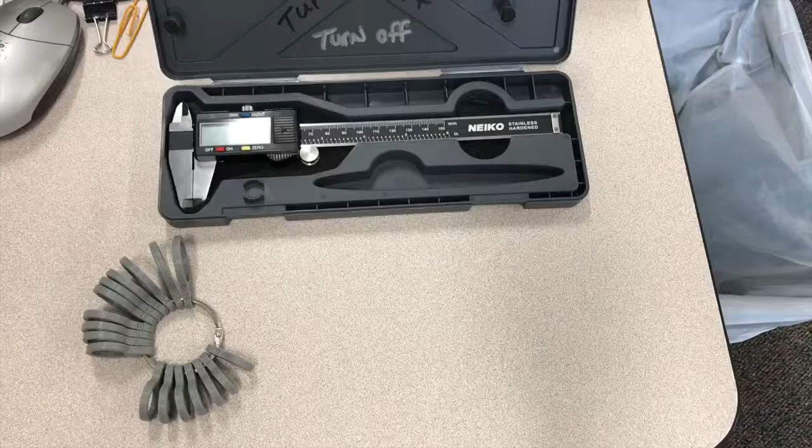This video is an attempt to clarify the issue people are having with making the rings the proper size for the ring project. Watch this video first. If you print the ring the wrong size, you do get points taken off for that, and I will not reprint it because you didn't follow directions.

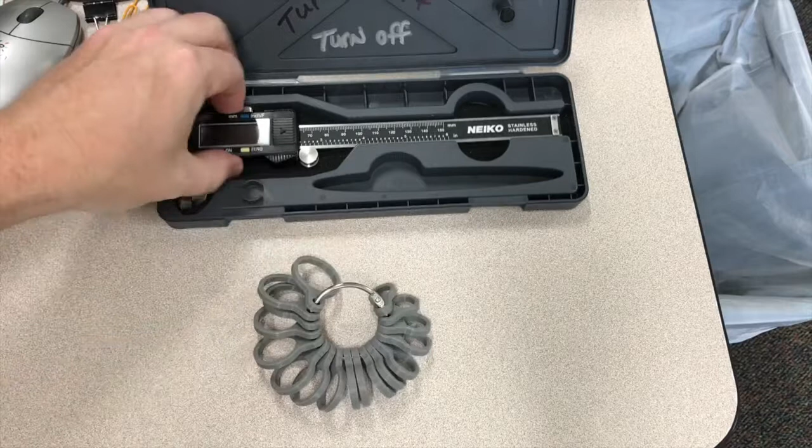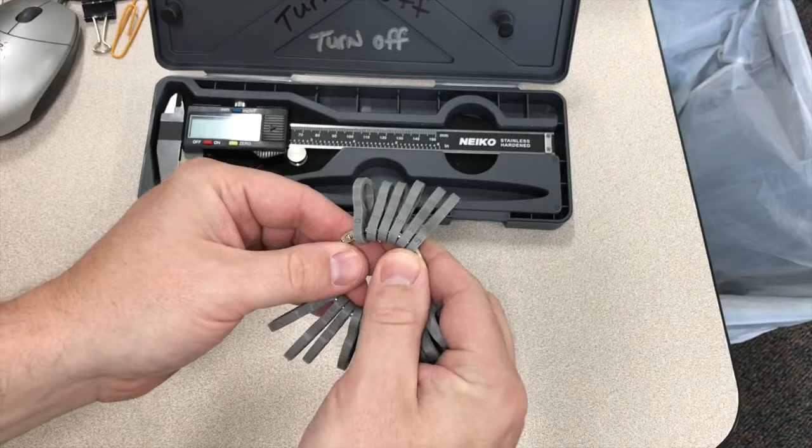You're going to need a few tools before you even start to design your ring: a ring sizer and a digital caliper. This is a jewelry ring sizer. You can see there are numbers on the side of each of these if you look carefully. That's just the number size so they go in order here. It doesn't mean anything for anything you need to worry about.

What you're going to do is go through - you can see the rings go from smaller to larger - and find the one that fits your finger correctly, whatever finger you want to put this on. Let's say I want to put it on my ring finger here.

This one's a little loose, so I'm going to go down a size. That one fits pretty good, and just to check, I'm going to go down yet another size. That one's a little tight, but it's not too bad, it's pretty good. I'm not going to shove a really small one on there - if it doesn't fit, don't put it on your finger. Find the one that fits correctly. That one's not bad, just a little snug compared to this one. I think that one's a little bit better for me. So this is the size I'm going to use.

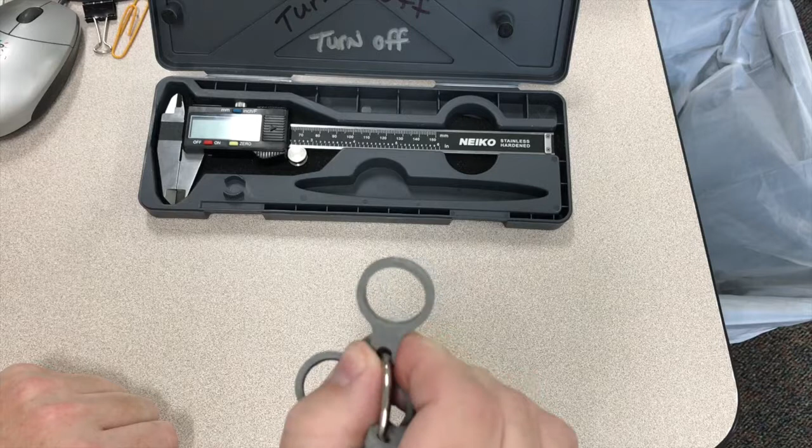Now for Tinkercad, we need to make a hole in our ring that you design exactly this size. To do that, you're going to measure it using the digital caliper. So take your digital caliper.

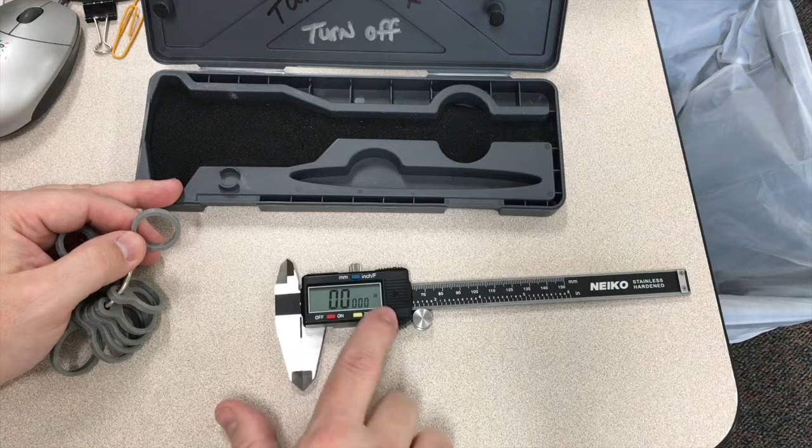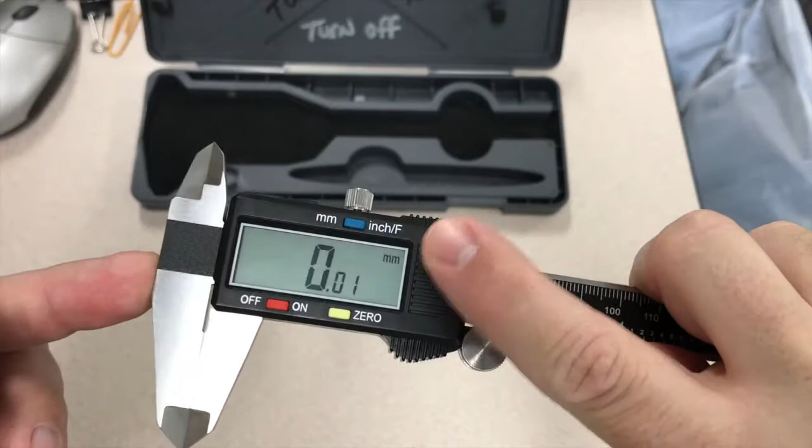Turn it on, make sure that it's not on inches, make sure that it is on millimeters. If you take a look at that, notice it says millimeters. I'm going to zero it out.

I'm now going to take this one that fit me, using the clamps here, the side that measures the inside diameter. I'm going to put it inside the ring, pull it apart. I've got like 19.3 that way. I'm going to measure it this way - 19.4. I'm going to take a few measurements - 19.3, and do another one - 19.3, 19.4. So I'm going to go with 19.3 because that's what it seems to be coming up with the most. So on your ring sheet, you would then write down 19.3 millimeters, and that is your inside diameter of your ring.

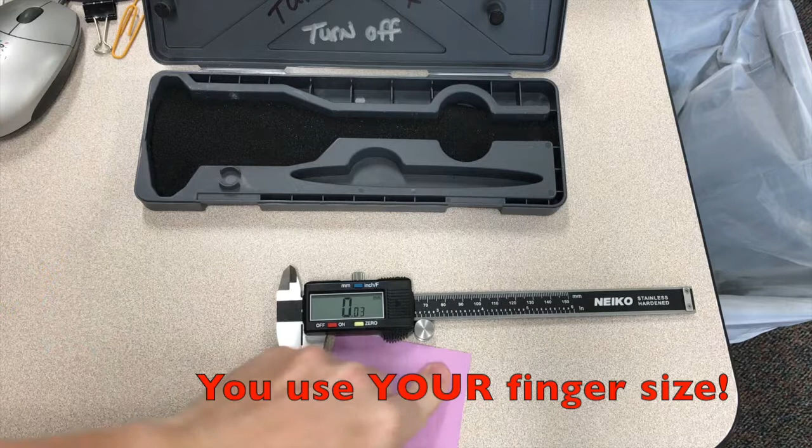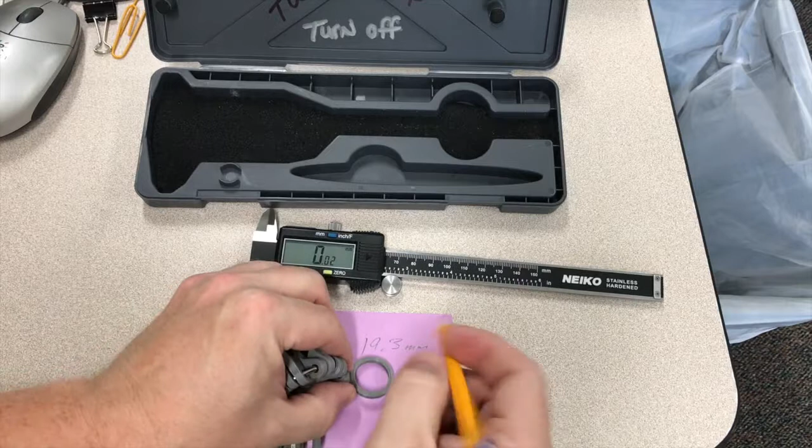So 19.3 millimeters, for my example, is the inside diameter of the ring that I need. Now, with that being said, that needs to be the hole size, not the ring. So if I were to take this, for example - right here is our 19.3. So what I need to do is make a hole this size in my ring in Tinkercad.

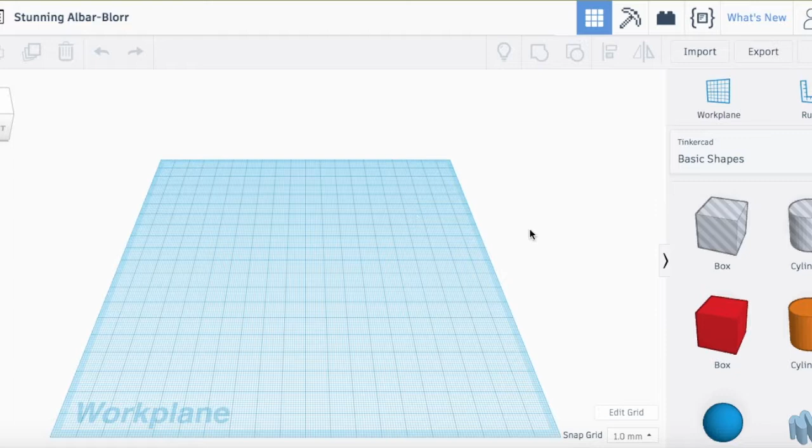So now that you have correctly measured the needed inside diameter in millimeters of your ring finger based on the ring sizer, we now need to make a hole that size. You're going to grab the cylinder and drag it out.

First thing I'm going to do before I even size anything is increase the number of sides to the maximum, because if I look at this, it'll be easier if I drag out a solid one. You see how along the edge here it looks like a stop sign kind of - of course it's not 8-sided, it's far more than that, but it's at 20 sides. If I decrease it... We want this nice and smooth, so we're going to take this and increase it to the highest number possible, and you can see it makes a nice smooth rounded edge.

Now we're going to want that for our hole, because this is where our fingers are going to be right against.

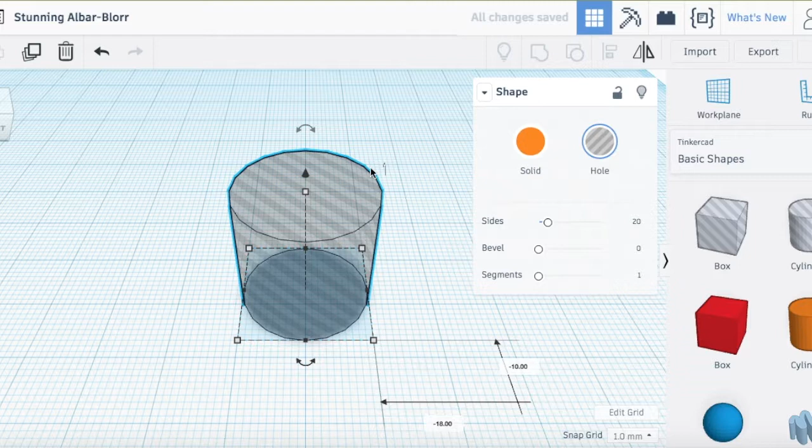We don't want any edges, so we're going to take this and increase our sides all the way up. Alright, now here's the important part.

Now we're going to size this correctly for our ring. In my example, my finger was 19.3 millimeters. Yours is going to be different. So I'm going to click on this, take the X and Y, and make it 19.3 on the X and 19.3 on the Y.

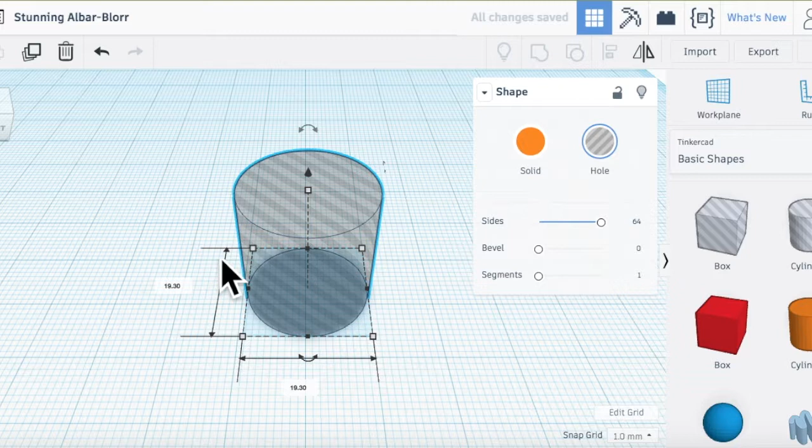Okay, so now this is the correct size. That is the size of my finger, the size of the hole I need for my finger.

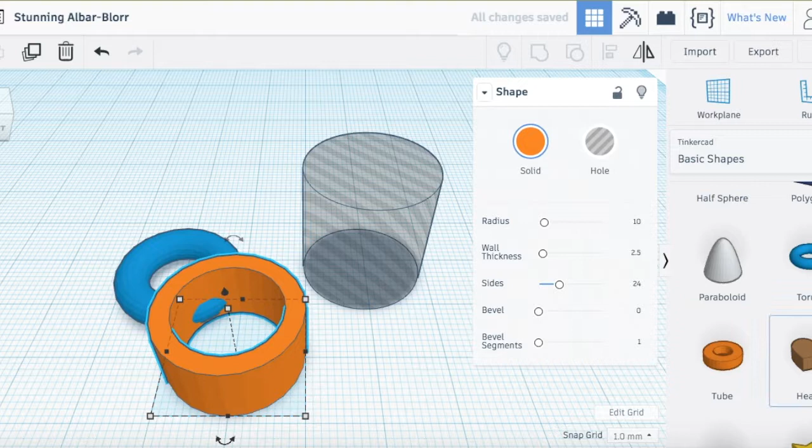Now we're going to make the ring part. You have a couple options: there's a torus, there's a tube. Either of these would work. I generally think the torus works best, but it's up to your design.

Do not just pull out the ring. Yeah, this looks nice, and you can make some adjustments on it. But if I were to take this ring and say, oh, I want this to be 19.3 because that's the size of my finger, so I'm going to make it 19.3, look, Tinkercad made a ring for me.

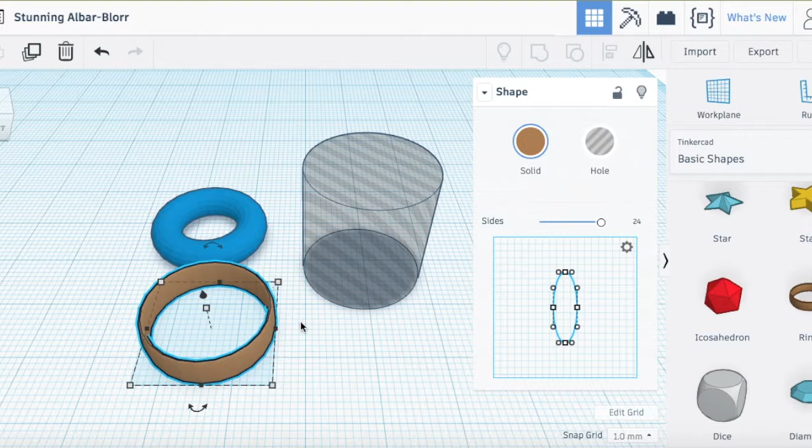No, that is the outside diameter, from the outside edge here to the outside edge here. If I were to actually print this and put it on, it'd be too tight. We want the inside hole to be 19.3, or whatever your measurement is. So don't just drag this ring out, okay? You need to make it.

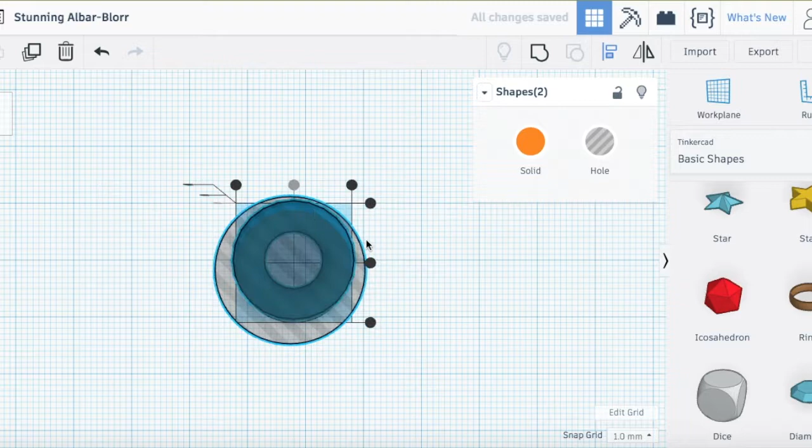So we're going to delete this. Now, I'm going to look at my torus shape here, and the measurements on it are 20. Well, I know this is 19.3, so like I was saying earlier, this is barely a millimeter larger. So if I were to align these like I would need to, center and center, you can see that if I were to cut this out, I'd be left with a tiny little piece of that torus. That's not going to work.

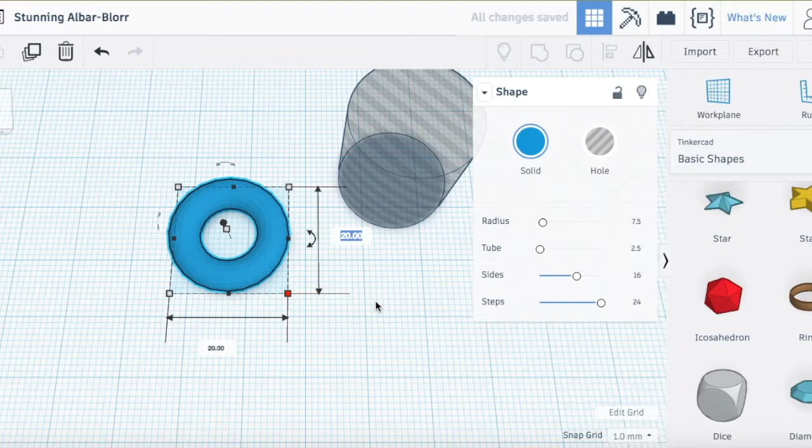So I need to make this thicker, and the thickness of your ring here is going to be decided upon your design. I don't want mine really thick, so I think I'm going to do 24.3 this way, and 24.3 this way.

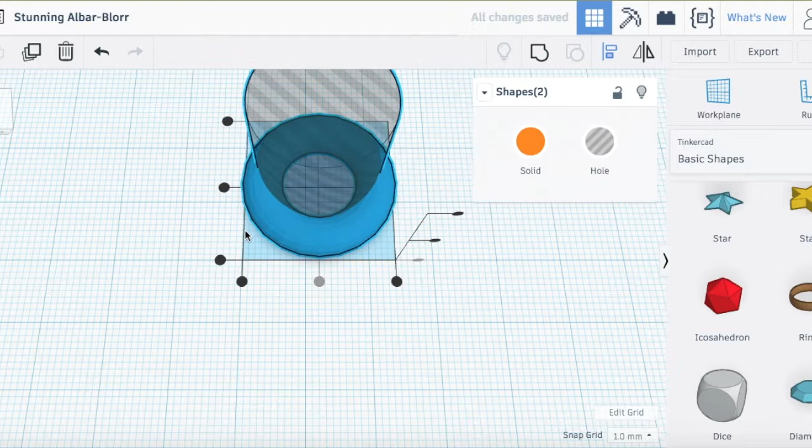Okay, so now if I were to align these and center them, you need to highlight them both, align them, and do center, center. You can see this would now give me a decent ring shape. So if I then group this, there is a ring that would fit your finger, and you can see the smooth edge on the inside.

Because remember, you need to do some engraving in here by using the letters. What I'm going to tell you about this is that you need to make sure you do this correctly. Now, the biggest, most important thing once you have this part correct is you cannot change this once you've made it.

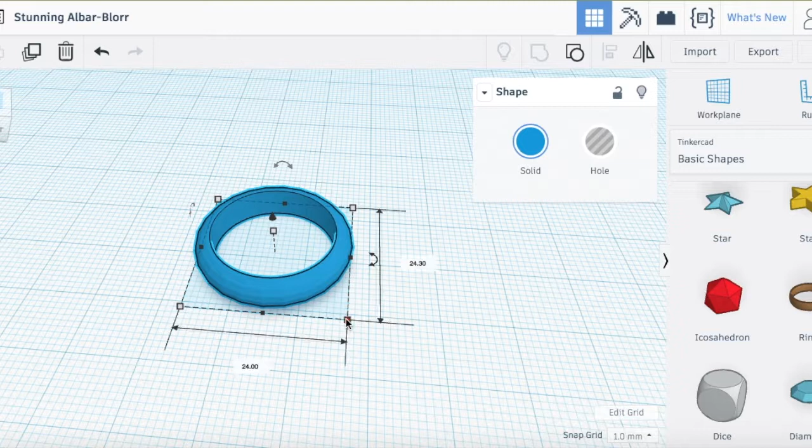Okay, so let's say I'm thinking, oh, I want to work on this, I need to see it larger. So I'm going to hold shift and make this larger. Well, guess what? It's now completely the wrong size, and this hole will be way too big. Alright, so I'm going to undo that.

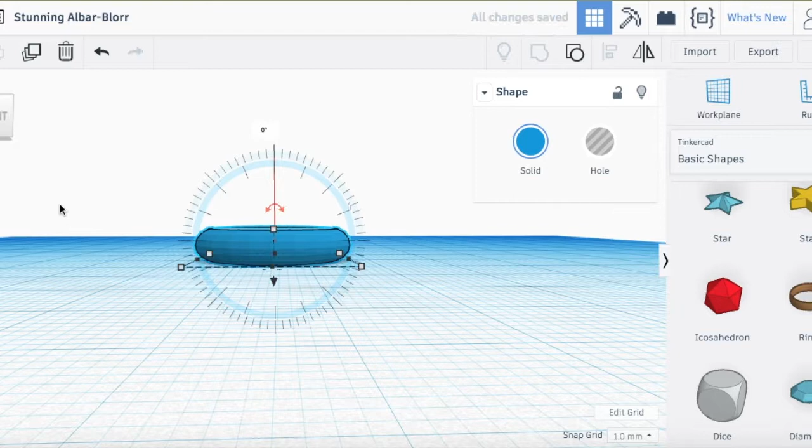Once you've made it this size, do not change it. You can rotate it, you can twist it around, it doesn't matter if I do any rotations to work on it in either axis. That's not going to affect it at all.

Okay, to then put whatever stones or whatever designs you want to put on there. Don't forget to do your engraving on the inside of your ring with your initials or name or whatever you had chosen to do, and then decorate it accordingly.

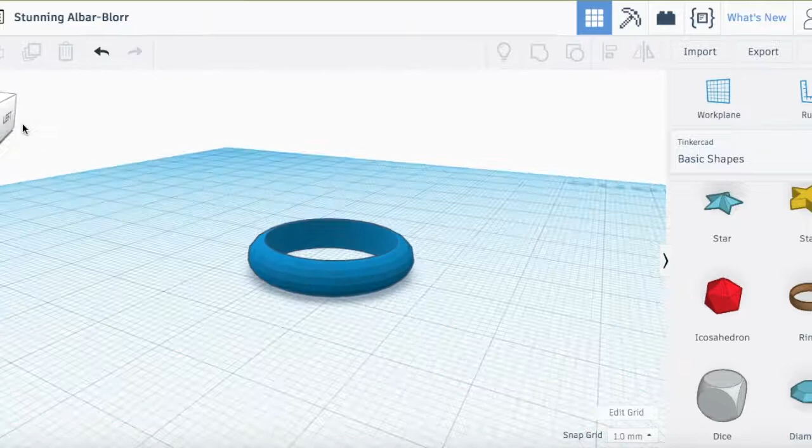But the important thing is, if you do not follow these steps, you will have the wrong size and you will get quite a bit of points off for not having a ring that fits. Make sure you follow these directions. If you have any questions still after watching this video, ask me.